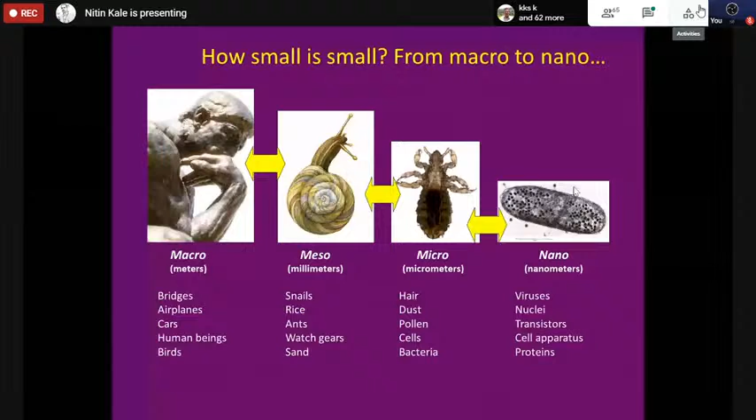So this basically takes us from the nano to the macro. A little bit of physics: at the nanoscale, we observe that certain properties that these structures or components have are quite different from what we see on the meso or macro scale.

For example, we know Newton's law of gravitation, that the force of gravity is proportional to the product of the masses, and inversely proportional to the square of the distance, right? Similarly, we know Coulomb's law, which says that the electrostatic attraction or repulsion is proportional to the product of the charges, not masses, and inversely proportional to the square of the distance.

Now, what happens is that if we start reducing the size, since the density of the material is the same, the mass is going to reduce. This will have an effect on the gravitational force between two objects, right? But the objects can still hold the same charge even if their sizes are reduced. And therefore, at the smaller scales, at the real life scale with which we interact, it is more the electrostatic or electromagnetic forces that are dominant. Gravitational forces are not dominant at the scales we are talking about, particularly in the nanoscale.

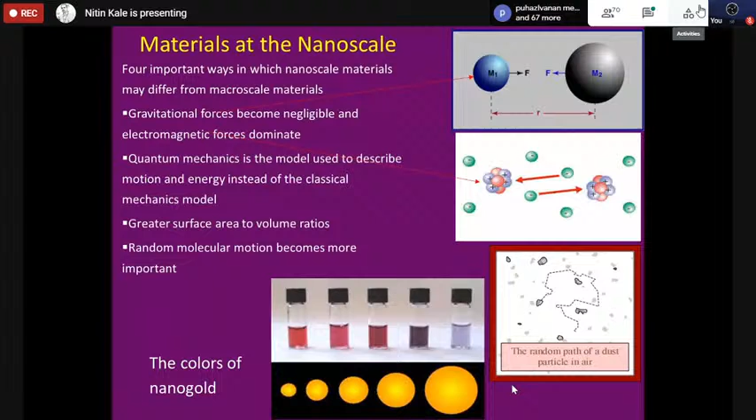This tells us something very important: you can tune the optical properties of a material by merely changing its particle size. This is very important, and it's something exploited in the nanoscale regime. Since microsensors or MEMS is now moving from the microscale into the nanoscale, it's important that we know this so that we can exploit this phenomena as well.

Coming back to the impact of surface to volume ratio, this is again a very famous slide, I'm sure you've seen this, so just an attempt to revise it. What you see is a block, a cube. It has a certain volume, certain dimensions, and therefore a certain volume and a certain surface area.

Now, if this is divided into 8 parts, split across the middle, what happens is that the volume still remains the same, but the surface area increases, because now you have exposed the inner surfaces. If you go on dividing that cube, you will realize that the volume still remains the same and the surface area goes on increasing, actually exponentially. So this hints to us that at small sizes, the surface is going to play a very dominant role. That is the impact of surface to volume ratio.

This can be explained by various ways, or seen in various natural phenomena. The best example is the so-called lotus leaf effect, where one part of the leaf is hydrophilic, the second part is hydrophobic. We can discuss that separately as well. But historically,

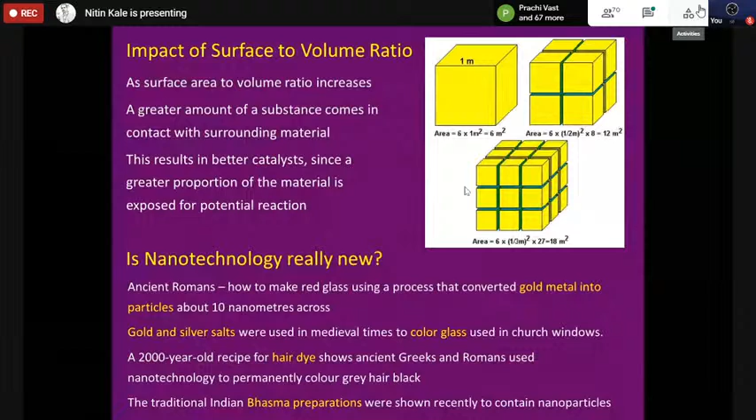This actually becomes a problem as well, in terms of just small volumes, if you look at it.

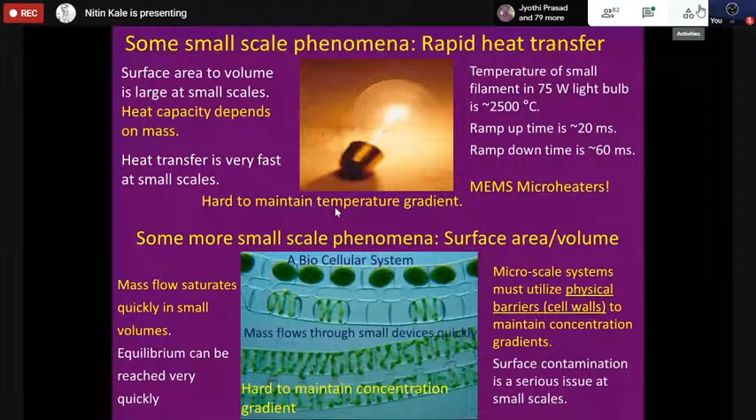Some more examples. Those of you interested in fracture kind of behavior know that even objects which are as strong as steel tend to give away and fail. Why does this happen? One of the fundamental reasons is that the material which looks strong otherwise, if you look at its microstructure at the micro scale, you will find that it has a lot of micro cracks.

And eventually, you have all those grains, etc. And when structures fail, the failure is going to start across one of these cracks. So people use a lot of thermal treatments to ensure that the cracks are minimized, the grain size is small, etc.

Again, another example from nature is the lizard. We are all aware that lizards find it very easy to climb walls. And if you look at the lizard, it has very small or very weak arms. So it was always a wonder for scientists to really know how these lizards find it so easy to support their own weight and climb the walls.

Then, of course, they did investigations, and they found out that the palm of the lizard has certain very micro scale structures. Biologically, it is called cilia. These hair-like structures are there in quantities of billions. And what actually happens is that between the hair-like structure and the wall, there are sort of weak forces, which are hydrogen bond forces.

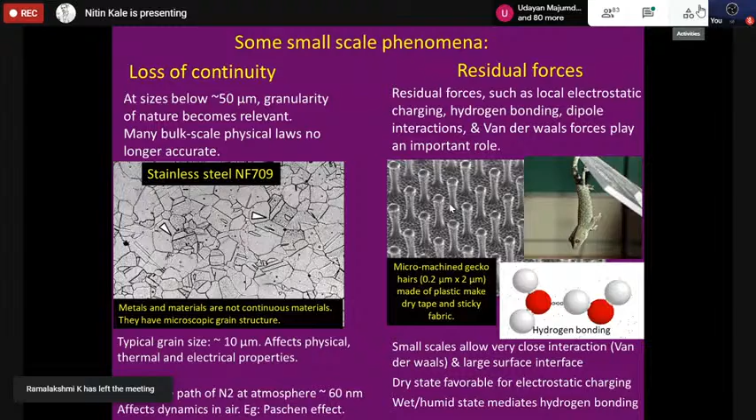So now, till now, what I talked about was about nanoscience, nanotechnology, and how it is providing opportunities to engineers and scientists to make more innovative products so that people can use them and make their life easy. Something slightly different from this was a guitar, which was microfabricated, I would say, at the University of Cornell.

The strings have a diameter which is perhaps fractions of a micron. They could actually make those strings and release it from the substrate, meaning this string is hanging and present only between this part and this part. It is stuck at these two edges. The guitar may be fixed at the base, and it may be fixed at the bottom too, one doesn't know, but the strings definitely are free. That is what you can see. So you can actually pluck the string and maybe you will hear a sound.

From the point of an engineer, we know that we make a system with the help of different materials. These materials go on to build different components. And then these components go on to build different modules or subsystems. And eventually you have the entire system that you see. So that is how we engineer a system.

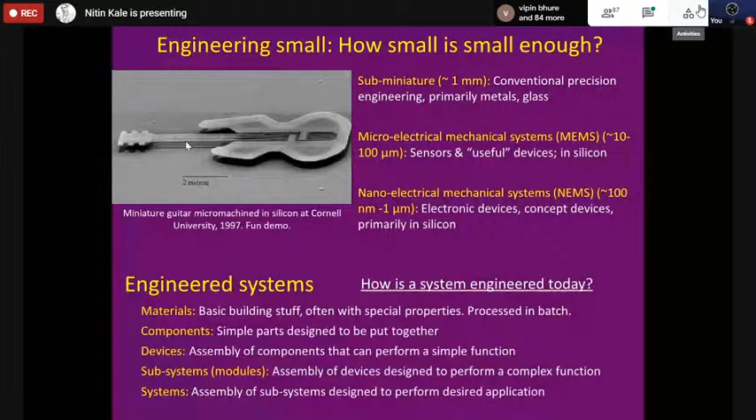And then, for example, the nuts, the bolts, those are different components. And then each component is made up of different materials. For example, people very well know that many of the tires coming in the market are made up of, or will have, a mixture of carbon nanoparticles inside them. That is to ensure certain properties of better thermal conductivity, heat dissipation, etc.

So this is an approach which explains how systems are engineered, and that is not too different from the greatest engineer, I would say, that is nature, that has helped the human body evolve from very simple unicellular objects, or maybe certain chemicals in the form of certain proteins and certain fats as well, around 4 or 4.1 billion years ago. So from those unicellular things, they replicated, they evolved, and finally you have a huge diverse ecosystem.

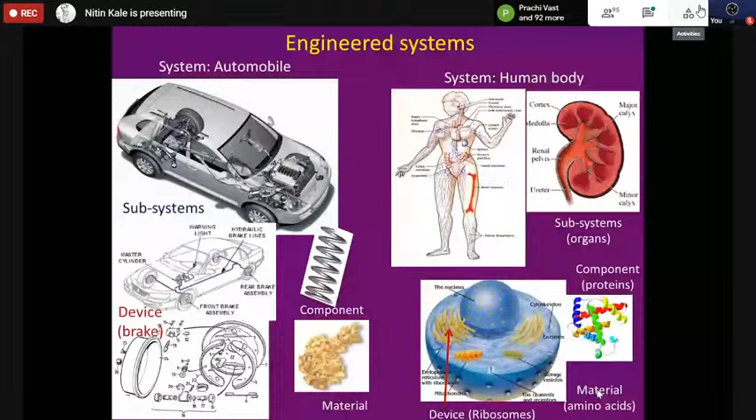With this background, since MEMS has learned a lot from nature and from biology, because it has to interact with the real world, these microsensors and actuators actually have to react, respond, or interact with the real world. Therefore, it's important to know the real world with which these devices are going to interact.

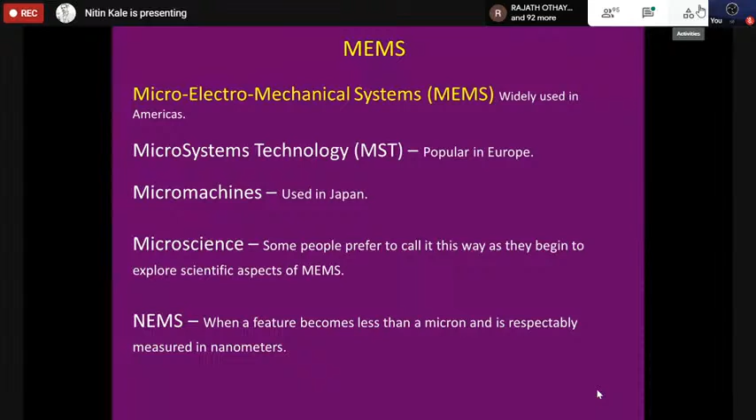So they have several names. Now more names definitely would have cropped up. For example, NEMS is the nano electromechanical systems.

So in terms of fabrication technology, MEMS has borrowed a lot of things from the IC technology, the integrated circuit technology. For example, batch fabrication and miniaturization. So these are two important concepts that we talked about from the scaling aspect as well.

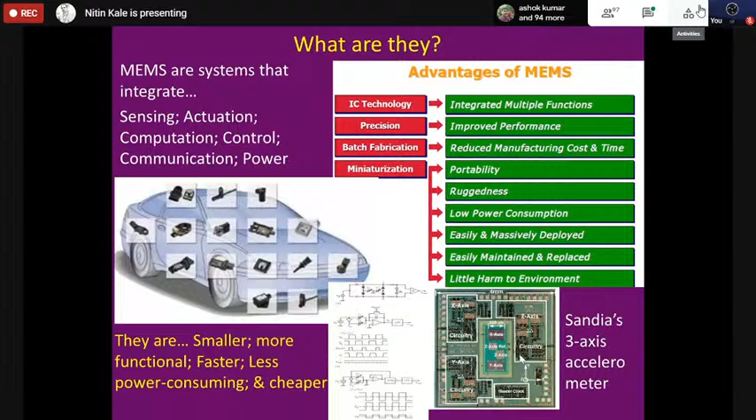Here is an example of an accelerometer, which we again know is a very famous MEMS device. You can see that it has a lot of circuitry inside. It has maybe possibly those fingers somewhere inside, and some clocks, etc. So this is the way you can actually engineer a MEMS chip.

In terms of sizes, the MEMS devices today, at least the suspended structure, the part of the MEMS device that is actually moving, is of the order of a few hundred microns to a few microns. Now, when I say size, I'm talking of the size which we use to machine. It is possible that we make use of thin films, which are about 100 nanometers or so, but I will not get into that part of it because we are not machining something there. We are doing machining of a few tens of microns, a few microns kind of devices.

And now people are going towards NEMS as well. So this is the scale aspect of it.

People also talk of MOEMS. The MOEMS is the optical part of it. You try to play with the light as well. The reason is that now your devices may have, for example, diffraction gratings or certain suspended parts which can be made to move, and the wavelength of the light is very close to the dimensions of the moving part. So that's possible.

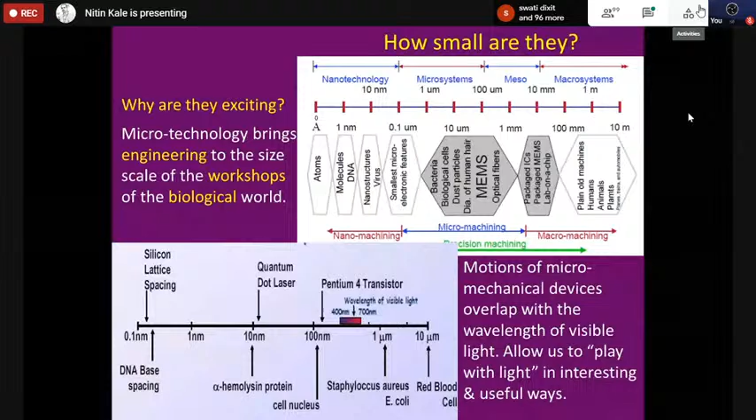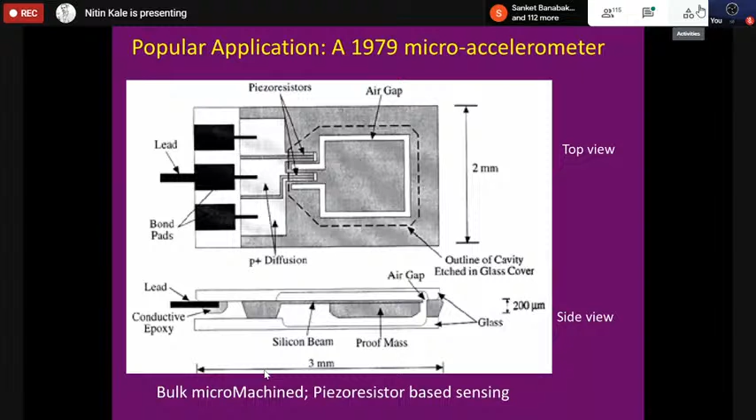So after accelerometers, people wanted to check if they can make motors, micro scale motors, and people struggled to make two particular MEMS structures. Again, mechanical engineers will know sort of a revolute joint and a sliding joint. So that made it possible for objects to move very easily in a controlled fashion. And this could now be batch fabricated. So how that is done, we'll come to the next slide.

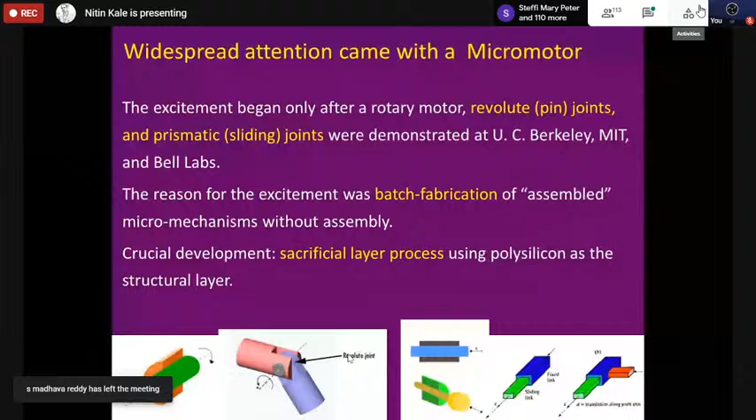And before that, MEMS devices have come into the industry for a variety of applications. For example, pressure sensors, inkjet printers, micro mirrors. These are three examples that we shall be seeing, but there are a lot of other MEMS devices as well, historically since the 1970s.

So as we have seen, in a MEMS device, you would have some sort of a suspended structure, which could be a beam or a diaphragm or a cantilever. It will be connected to some sort of a substrate, and there would be some electrical, optical components on the device. They are small, of course, because you want to exploit the microscale features. And making them in large volumes, you can make them cost effective as well.

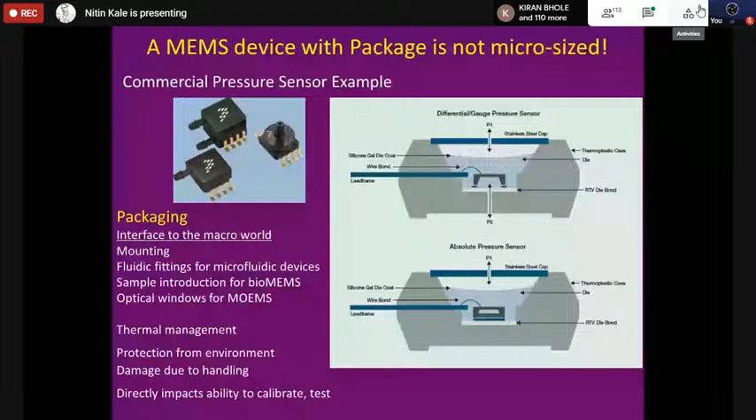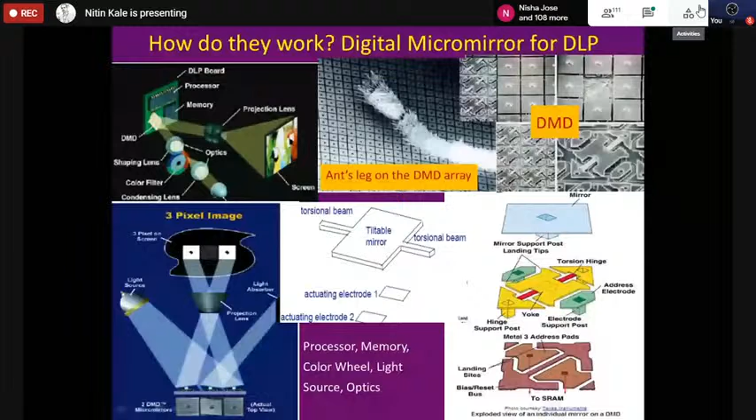So this is the device, and it has made a lot of money. Another device - I'll now come to the piezoelectric part of it. As somebody had rightly said, if you apply a voltage, it deforms, and if you remove the voltage, it comes back to its original shape.

That particular property is exploited in the inkjet printer head. You have a piezoelectric element, a reservoir of ink, and a nozzle. By applying a voltage, you can pull this element so that more ink gets into the chamber. When you want to release the drop, you remove the voltage and the drop is pushed out. It appears very simple, but the piezoelectric element makes this possible.

The other technology very popular in inkjet printer heads is the thermal inkjet. Here you have a micro heater, a nozzle, and a reservoir. If you heat it, air inside the liquid expands and a bubble forms, ejecting the liquid out. When you cool it, the volume reduces and you can draw liquid into the chamber from which you want to further eject it.

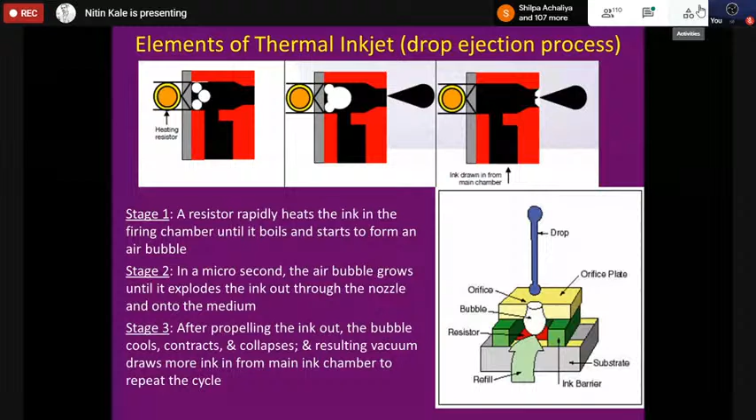So these are two technologies, the piezoelectric and the thermal or micro heater one. One is used by Epson, one by HP - I don't exactly recall which uses what, but both have been very successful. Today HP and Epson are looking for new applications for these technologies, because nowadays people don't mostly use inkjet printers, but the technology is available, so they want to find different applications for it.

Now coming to the physics part of it, for an inkjet printer - going back from engineering to science. As mechanical engineers, you know the motion of the drop depends on many things: what is the disturbance, what is the density of the fluid, what is the surface tension, at what temperature the ambient is, at what length the drop forms from the liquid stream, what is the spacing between drops, and what is the diameter of the drop. All of this has to be thought about, and knowledge from physics helps in doing the engineering part of it.

One simple thing - if the drop is moving, it's going to encounter viscous forces from the air. It will also feel a bit of gravitational field, although the viscous force might be much more powerful than that, but you have to think about it. That is what I was trying to bring about from this slide.

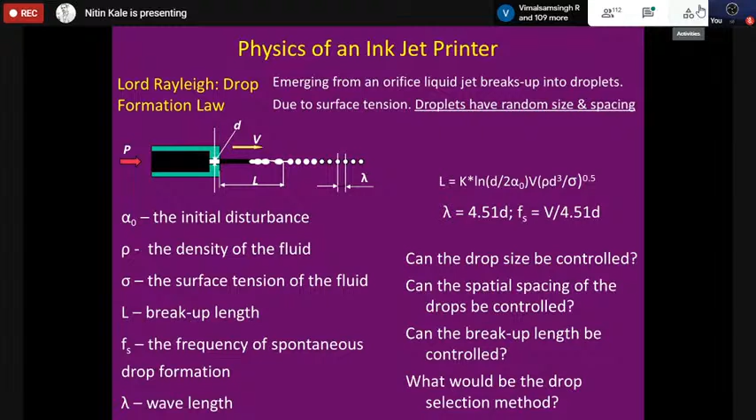Further delving into engineering, what are MEMS devices made up of? We'll now talk about materials and processes.

In the early 70s, recall my earlier remark that MEMS technology has always followed CMOS technology. Whatever equipment was used to fabricate CMOS devices, when it became outdated—for example, people moved from 90 nanometers to 65 nanometers, then to 32, then to 5 nanometers—that equipment becomes obsolete. And MEMS people are like vultures, or scavengers I'd say. The moment the CMOS industry treats something as obsolete or discards it, MEMS people are there to scavenge those equipment.

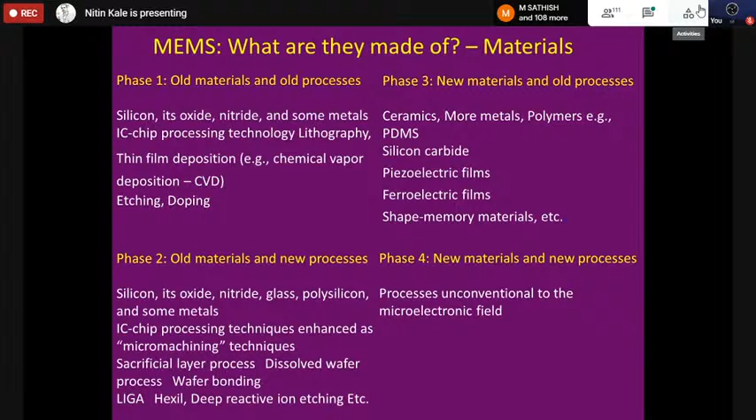Today, for the last 8 to 10 years, people have been using exotic materials and exotic processes. I won't get into that, but for example thermal embossing—some sort of embossing technique that was never there in the past. For thermal embossing, you use plastics as materials. So that is a new material and a new process.

Is this slide visible? Yes, sir. Okay.

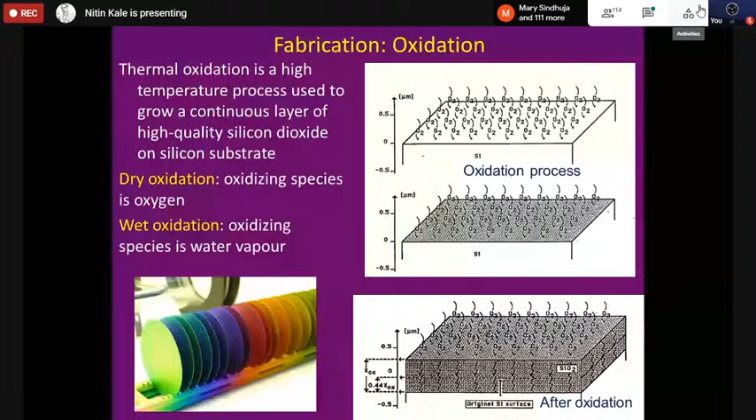I'll come to deposition very soon. An equivalent process is diffusion. Somebody mentioned doping, I believe. There was a hint of that. You need to dope semiconductors because you want to change the electrical properties, the conductivity, for example. Now, how do you dope?

If you have this as your silicon, please follow the cursor. If you want to dope in this region, you would put a hard mask on the silicon up to this region, and the same hard mask up to this region. What you have basically done is open the mask here. Now you put a source of dopant here—it could be another wafer of, let's say, boron. So there is a silicon wafer and there is a mask. The mask could be a reasonably thick oxide or nitride, and you have an opening in the mask.

You raise the temperature, put it in a furnace, and raise the temperature. Now these dopants are going to diffuse. Boron has a very high diffusivity, so it's going to diffuse, and you will have a profile of boron in the silicon, something like this. The rest is something you already know—boron and silicon form a bond, and it leaves a hole behind, and that becomes a conduction... a charge carrier. Any questions on this diffusion?

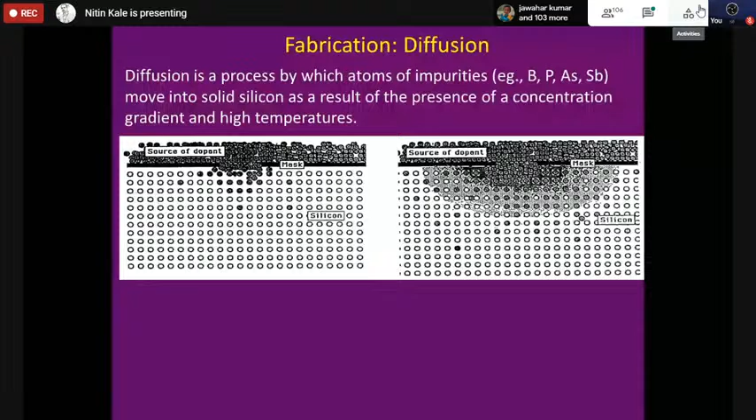The other technique—so growth is one technique of making a film on silicon. The other technique is thin film deposition, and I'll be specifically talking about chemical and physical vapor deposition. Please remember that deposition and growth are two different things. In growth, the substrate is consumed. In deposition, the substrate is not consumed—the film is simply added.

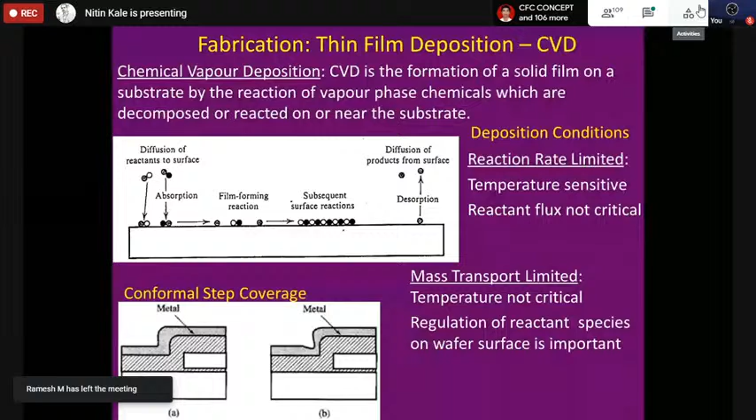There are two types of depositions: reaction rate limited and mass transport limited. Basically, mass transport means how much gases you are putting in, the quantity of them, the flow rate of them, and the deposition being a function of that. In reaction rate, it's the temperature—at high temperature, you would have higher deposition rate. So those two regimes are there.

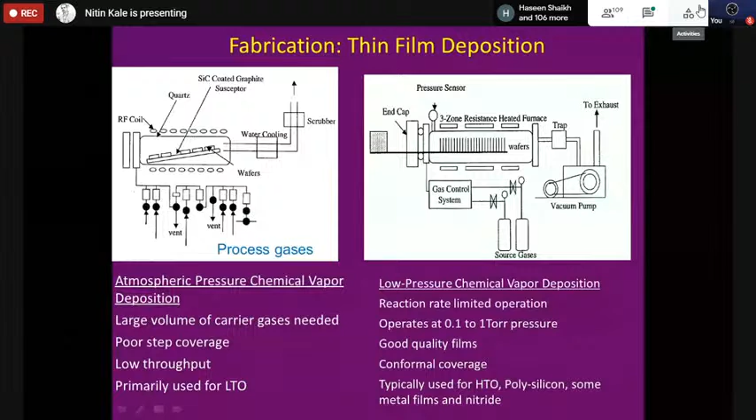In low pressure CVD, which is the popular technique today, in addition to all what you saw here, you will have a vacuum pump. This vacuum pump essentially evacuates the chamber, and the gases of course are removed, but the deposition happens at a low pressure. The quality of deposition is good.

There is another technique which is called plasma enhanced chemical vapor deposition. In this technique, instead of using temperature to dissociate the gases, we use plasma. That's all. So you will have two plates, a high voltage across it, RF or DC, depending on what you want to deposit.

And then you can create a plasma, and let's say using ammonia, you get nitrogen, using silane, you get silicon, and both are going to react, combine, and form silicon nitride, and that's going to be deposited on the wafer. It will get deposited elsewhere also, but it deposits on the wafer as well.

The advantage is you can do depositions at low temperature. The substrate temperature could be as low as 150 to 200 degrees Celsius. In LPCVD, you need something like 650 degrees Celsius. I'll come back to this topic when we discuss hot wire CVD.

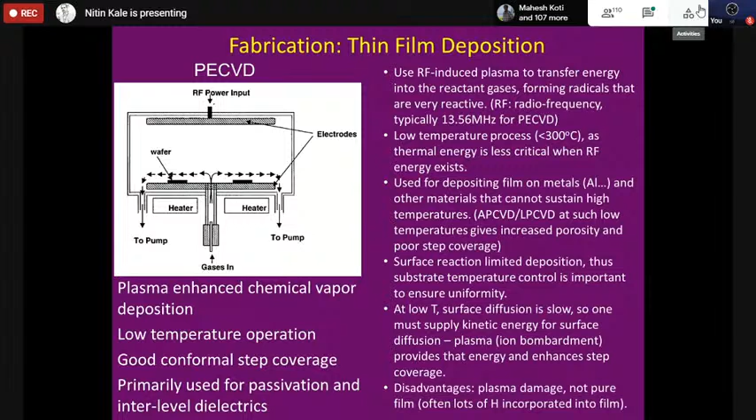You can also do what is called physical vapor deposition. One example is evaporation. The best example of evaporation is, I talked about the light bulb. So let's go further back, the lanterns that we had. You had a wick immersed in oil, and you lit it up, and you had a glass covering around that, right? So that was giving out light.

But if you cover the open side of it, at the top, if you cover it with a cloth or paper, then in a few minutes the light will go off. But on the paper you will collect that sort of black powder. So that's a deposition of carbon onto that particular paper. The same thing happens in a thermal evaporation setup.

What you do is you put a charge inside some sort of a boat, and you have wafers lying around here, and you pass a very high current through it. The item present in the charge could be aluminum or gold or something. Of course, this is also evacuated—please keep that in mind. So that is evaporated, and when it evaporates, it deposits everywhere, but it deposits on the wafers that are kept here as well.

You can also do E-beam evaporation. Essentially, you have an electron beam now generated by thermionic emission, and you control its path so that it falls onto this boat on which the charge is kept, and the charge is going to get evaporated because of the high temperature. And of course, then you can control where it's going to deposit.

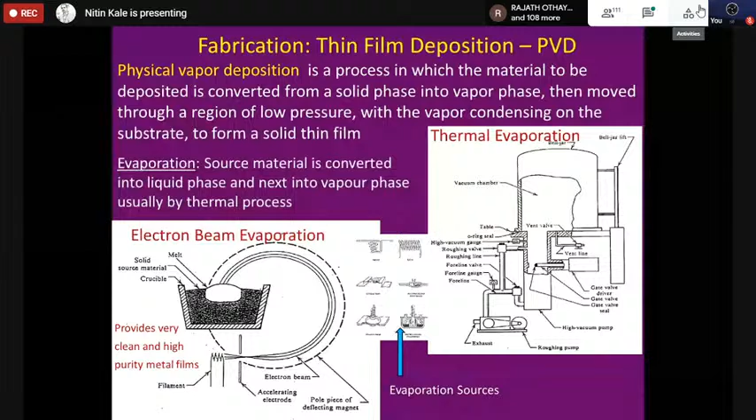There is another method called sputtering. This is again a very popular method. It uses a magnetron. It's called, sometimes in some cases you may have reactive sputtering as well, but the technique is slightly different.

So you have a wafer here on which you want to sputter a material, let's say gold. You have a plasma chamber, so you have all those plates and high voltages, but you also have a sputter target, and then you have a sputtering gas. This sputtering gas is accelerated—first of all, it's ionized, so you have all those ions.

Then those ions are accelerated so that they can hit the target. On the target, as I said, you have the gold target. So when it hits the target, the gold atoms are sputtered, removed from the target, and they go everywhere, but they will also fall on the wafer, and therefore this deposition happens. This gives very good quality of films. The adhesion is good, the uniformity is very good, and it's very popular.

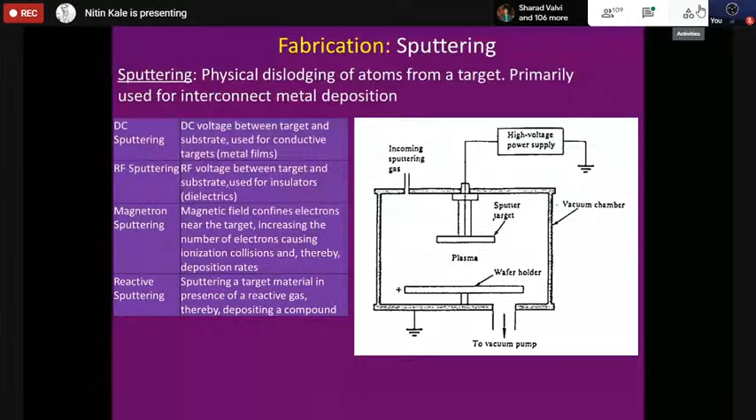In lithography is used to do pattern transfer. Deposition and growth are additive processes. Lithography is used to define something. So how is that done? Essentially you coat the wafer with the photoresist. Photoresist is a chemical that is sensitive to light. You selectively remove the resist from certain parts so that a certain pattern emerges, and then do what is called development. So first expose the resist to light selectively and then do the development. It's similar to the development done by photographers earlier when those films were there. And then you always have an option to etch. You put some chemical so that the thing you wanted to remove is going to be removed, and then you can strip the photoresist.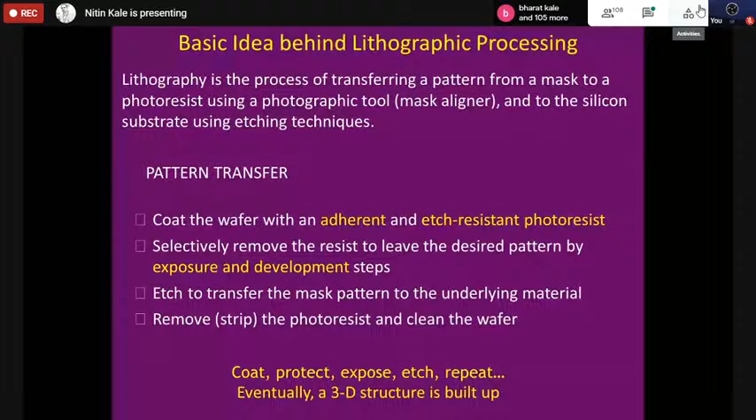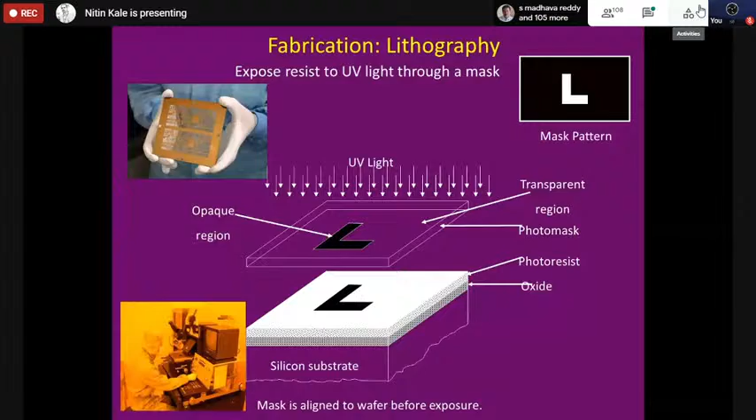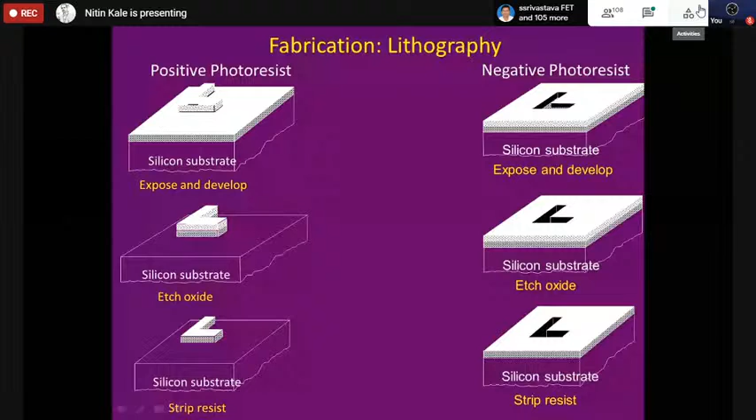We'll just go through this. Resists are of two types, positive and negative photoresists. Positive photoresist typically will weaken if you expose it to light. Negative photoresist will harden if you expose it to light. So either of the two, by using both of the techniques, you can protect whatever part you want.

So you may have what is called a subtractive or an additive pattern transfer. For example, let's say this is the substrate, this is the mask, this is the film. You put a mask here, you etch. So when you etch, the film is protected here. So after you remove the mask, you have a pattern which is something like this.

Okay, you may have a different sort of additive pattern transfer. This is your substrate, this is your mask. You do a lithography so that you remove the photoresist from this part. Now you deposit a film, and then this is called a lift off process. So now you deposit a film and then you do the lift off in which the photoresist is removed. So along with the photoresist, the film also goes from here and you have the pattern that you wanted on the silicon wafer. So these are two different techniques.

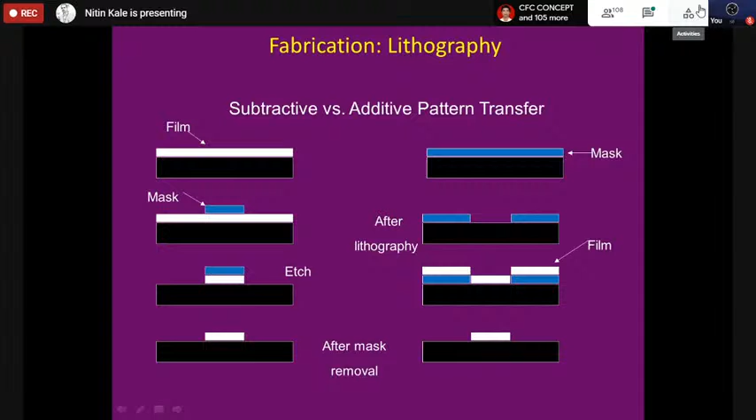This is not very popular in the industry, but it is very popular with the students. This is the thing that is used in the industry. It gives very good quality of adhesion and good quality of materials.